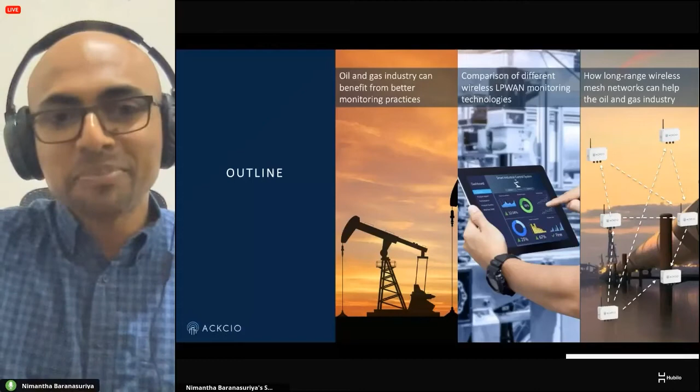So let's get started. I'm dividing the content into three main sections. First, let's take stock on what's happening in the oil and gas industry and how things are being monitored. Next, I'll give a quick overview on different long-range wireless technologies, or LPWAN technologies, that the industry can use to implement monitoring solutions. Thirdly, let's talk about why long-range wireless networks are better suited for monitoring in industrial settings like oil and gas projects, and finally how these long-range solutions can help the oil and gas industry do better monitoring. So let's start with the first part.

Most industries, including oil and gas, do a lot of monitoring to achieve a number of business goals. I'm outlining six here. These are quite obvious actually. Monitoring is done to reduce costs, and to ensure that the assets' lifetimes are extended as much as possible. There are a lot of regulations that govern industrial projects, including oil and gas, so these monitoring practices are required to ensure those regulations are met. And of course, we don't want to expose any of our workers to unnecessary risks, so that's another key requirement.

With monitoring, we get data that is required to manage risks. If something disastrous is going to happen, we get warned, and based on that information we can take quick remedial actions to make sure these things don't end up in a disaster. That's a key risk management element. And finally, with monitoring solutions, we can get data to increase the productivity of our projects as well. So these are quite straightforward.

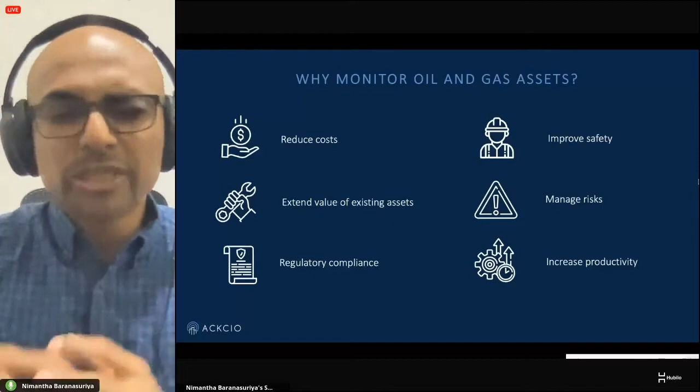So to achieve these business goals, we need to deploy monitoring solutions. There are 3 key monitoring techniques currently being used. This isn't very specific to oil and gas; it happens in other industries like construction and mining, where we're involved as well.

The first key solution is, of course, PLC and SCADA-based systems, where everything is wired. If it's a very small refinery kind of setting, everything can be wired up. All the sensors that need to be monitored can be wired to a PLC, and using a SCADA system, they can be controlled.

However, this becomes quite expensive to deploy, because if the refinery spans across a huge geographical area, you'll be running lots of different cables, and it's not easily extensible. If the refinery grows, you'd have to install more systems, more wires, and the maintenance becomes quite a big headache.

Satellite monitoring is also used a lot, but it's quite expensive. It's not straightforward, and there might be obstructed areas in the oil and gas environment that satellite monitoring could not cover. Finally, with manual monitoring, this is also expensive because you need to send an army of workers or technicians to do manual inspections.

And ironically that exposes them to risks and decreases safety. You're conducting monitoring to improve safety, but by exposing more workers to the site, you're decreasing safety as well. Also, manual monitoring can't be done frequently. So let's say you're inspecting things every week—between 2 visits, a lot of things can change, especially if the project is quite dynamic.

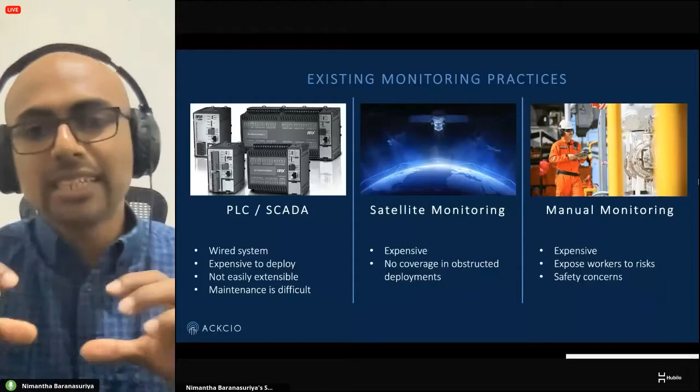So these are not the best ways that monitoring can be done. There are better ways, especially using wireless technologies, that can actually help assist the industry to do better monitoring.

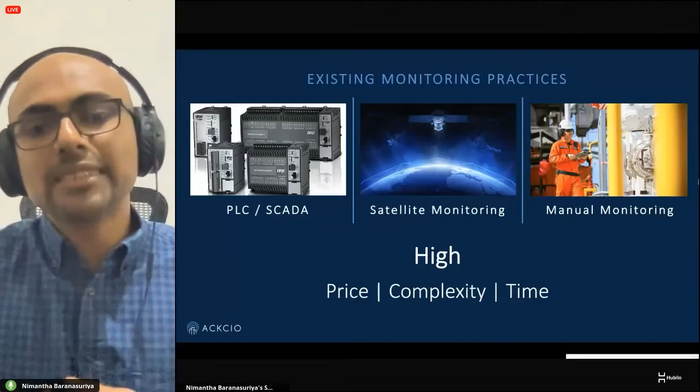So the high-level problem with these monitoring solutions is that the price, complexity, and time are quite high. All these are very expensive solutions. The complexity of deploying them can be quite high—like in PLC systems, you'd be laying a lot of wires, and maintaining that can be quite complex.

And with workers, for example, the time consumption for monitoring is very high. As I said, between 2 visits, a lot of things can change, and you might not know what's happening between 2 different inspection visits.

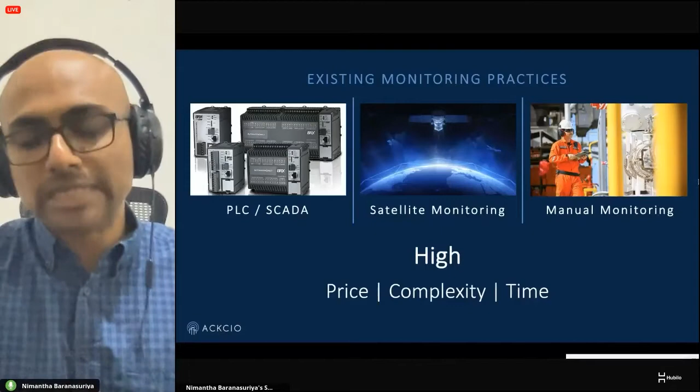So this is where the new wireless technologies can come into play. All these IoT technologies have been improving a lot. There's a lot of movement in the industrial space, across different industries, in terms of adopting wireless solutions for conducting better monitoring. Let me give you a quick idea of how this works.

As before, in any project, you first need to capture physical parameters and convert them into digital values—that's where sensors come in. In the oil and gas environment, you can think of things like temperature sensors, gas sensors, water level sensors, or flow rate sensors. There are so many sensors that already exist, and these now need to be scattered around to monitor different parameters in the refinery.

So let's look at a refinery, for example. These sensors now need to be monitored. Back in the day, you would either connect them to a PLC, send workers to inspect them, take manual readings, or deploy a satellite system. But instead, in a wireless setting, these sensors would be connected to a transmitter, a radio transmitter called a node.

Typically, most systems refer to this device as a node. The sensor would be physically connected to the node, and these nodes typically run on batteries, so they can be placed anywhere in the project. All the different sensors would be connected similarly to nodes.

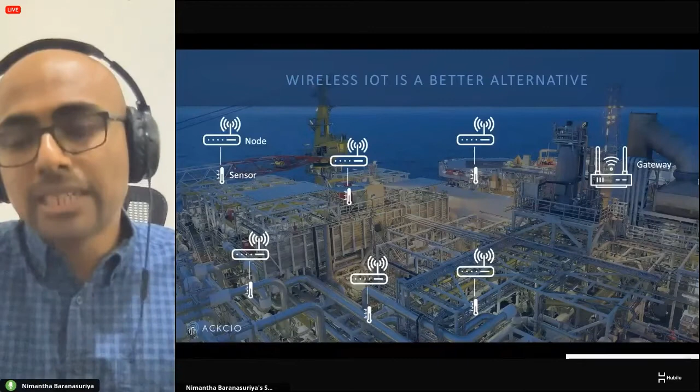And finally, there would be a central device called a gateway or a hub—this is where all the data should end up. This is the master receiver. These nodes periodically take sensor readings from the sensor they're connected with and use wireless radios to transmit their data to the gateway.

So what changes compared to PLC systems and manual monitoring is that this process is entirely automated, and it's quite easy to expand as well. If the refinery grows, you can install more sensors and more nodes as and when you need it—it's pretty ad hoc, so it's quite easy and scalable.

Finally, when the gateway receives all this sensor data, it can upload it to either an on-premise software system or a server, or if it has cloud connectivity, upload it to a central software system that the refinery maintains, so all stakeholders have access to this data for real-time decision making.

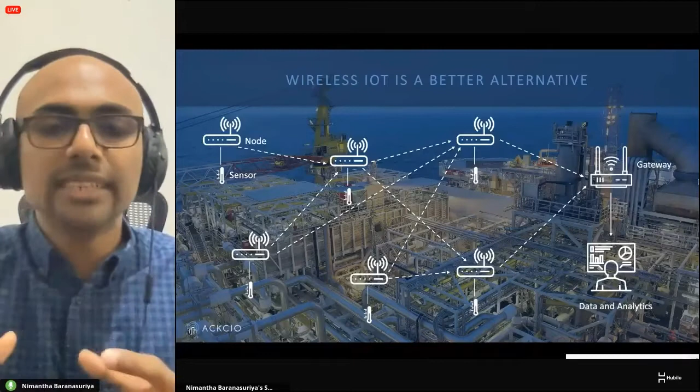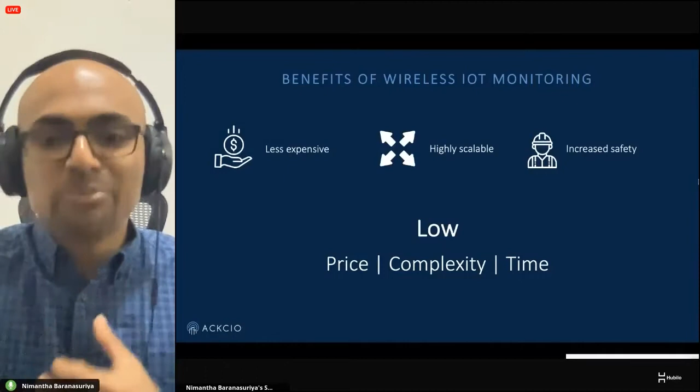This is why wireless is better. It's less expensive and highly scalable because you can deploy systems easily without worrying about wiring. It increases safety because you're not exposing workers to unnecessary risks. The price, complexity, and time triangle we talked about earlier become really low when switching to wireless IoT monitoring systems. This is why industrial projects are better served by wireless systems, since it's easy to deploy, easy to extend, and reduces maintenance headaches.

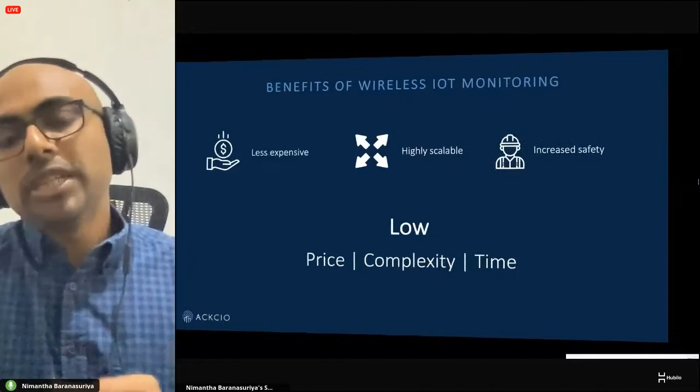Now when it comes to deciding which wireless technology to use, things get complicated because there are so many different technologies out there. In the second part of the talk, I want to compare some of these technologies to show their pros and cons, and argue why long-range wireless mesh systems are better suited for oil and gas. Let's go through that comparison now.

If you look at all the wireless technologies out there, they can be divided into two categories: star and mesh. As we discussed earlier, there would be sensors that need to be monitored. These sensors would be connected to nodes, and there would be a central gateway that receives all this sensor data wirelessly.

In a star setting, the gateway would upload all the sensor data it receives to a central server or software system. In the mesh setting, it's exactly the same - there are sensors and nodes, the gateway receives the data and uploads it to a server. So far everything is the same.

Now this is where things change. In star systems, every node has to transmit its data directly to the gateway. Whereas in mesh systems, that's not the case - they talk to the gateway as well as to their peers.

So here's the importance of this. Let's say there's an obstruction in a project, like a massive tank, blocking a radio link. In star systems, when the obstruction is there, this link gets disrupted, and all the sensor data from that particular node would not be received by the gateway. All that data is lost.

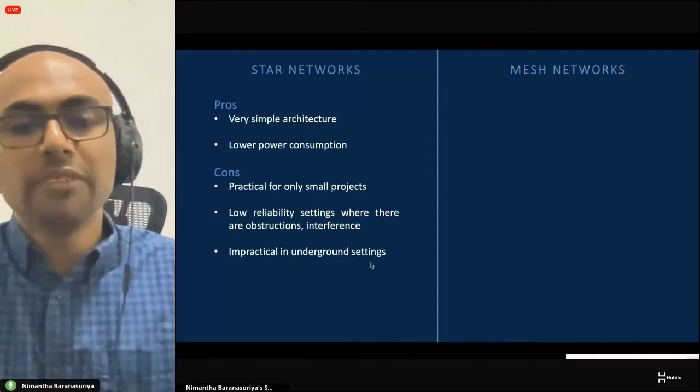Mesh networks offer so much more benefit. They're massively scalable because you can deploy them anywhere, and the devices, because they talk to each other, form very reliable connectivity and data collection in almost any setting. It's suitable for large and small projects, as well as underground projects.

And the other very cool thing about mesh systems is that they give you bidirectional communication. So not just can you have the nodes talking to the gateway, the gateway can talk back to the nodes as well at any point in time.

The cons of this: it's a bit more complex in terms of the architecture when compared to star networks, but when designed properly, the industry or the users don't even have to worry about that, because the mesh is constructed automatically. Also, the power consumption is relatively higher when compared to star networks, but still, although the power consumption is higher, the batteries still last like several years even while running a mesh.

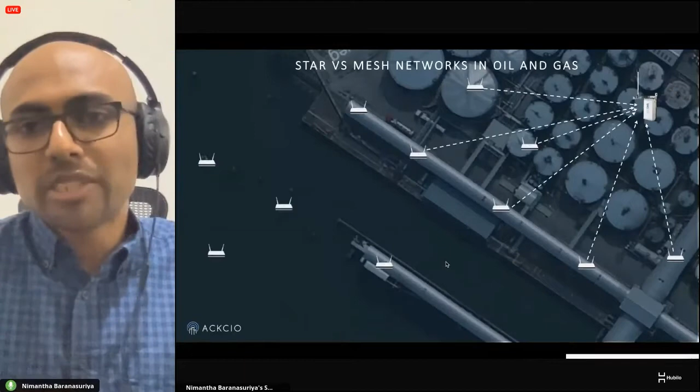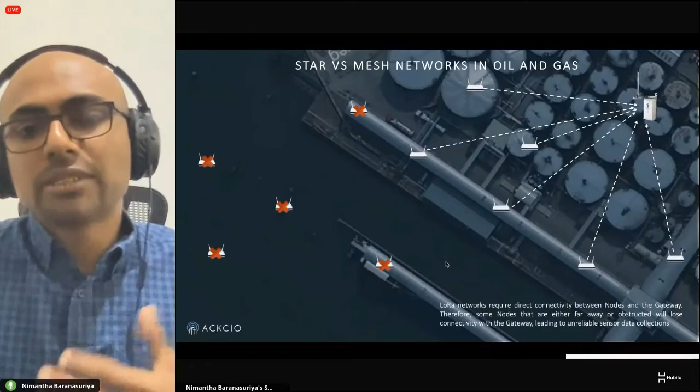So let's again look at some examples of what happens in star systems. As I talked about earlier, every device has to talk to the gateway directly, but there might be some nodes deployed so far away from the gateway that they might not be able to reach it, or there might be obstructions, and therefore in LoRa kind of star systems, the reliability can be lower.

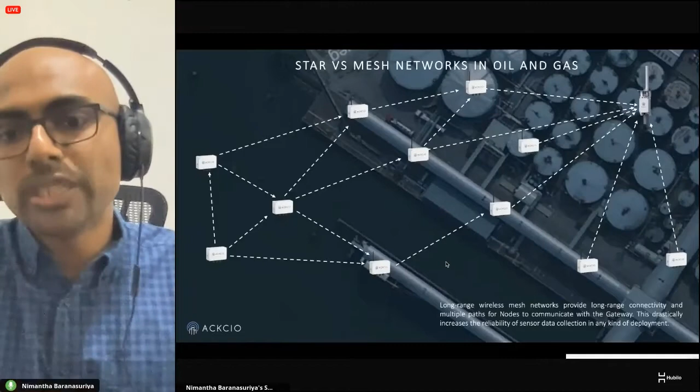But in mesh systems, what happens is they still have long-range links, so they continue to talk with the gateway directly, and the others who can't reach the gateway are not left behind. They talk to their neighbors, and the neighbors forward the data to the gateway. So when you have a long-range mesh system, the reliability can be so much higher.

I also want to take a bit of time to debunk a few myths surrounding mesh systems, because people have been burnt by deploying short-range or Zigbee-based mesh systems in industrial environments. So there's a lot of negativity on mesh networks. I just want to share some thoughts on that.

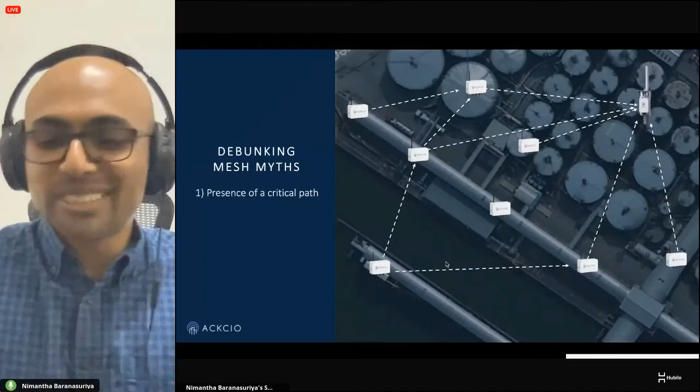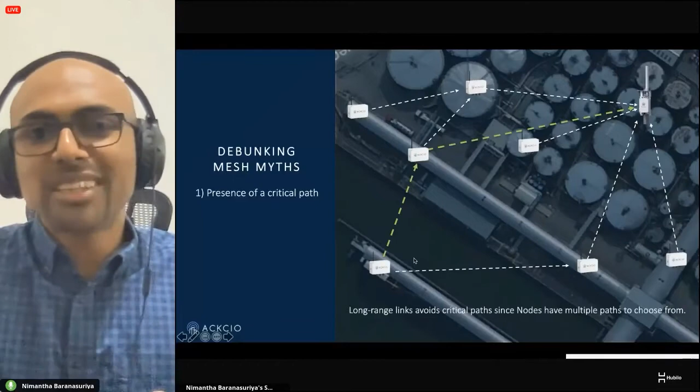The first key disadvantage that people talk about with mesh networks is a critical path. Let's say there's a path being used by a node to send data to the gateway, and a critical path is like if one node gets lost, people argue that this node does not have a path to reach the gateway. That is not correct, because in long-range mesh systems, typically because the communication distance is so long, each node has multiple links or multiple options to choose from. So there's no notion of a critical path in almost every single project we've dealt with, because again, they have multiple paths to choose from. When one gets disrupted, they automatically switch over to a different path.

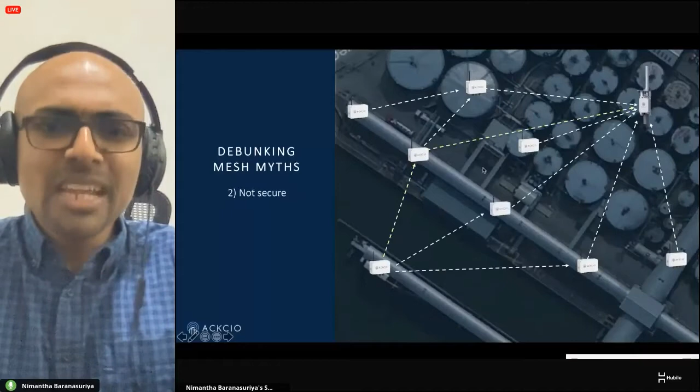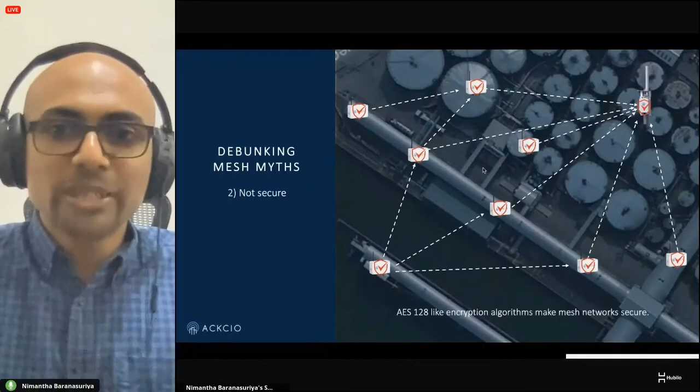There's also the argument that they're not secure, which is not correct, because most new-age long-range wireless mesh systems use AES 128, very secure encryption algorithms, to make the projects quite secure, or the transmissions very secure. So there's no question about security here.

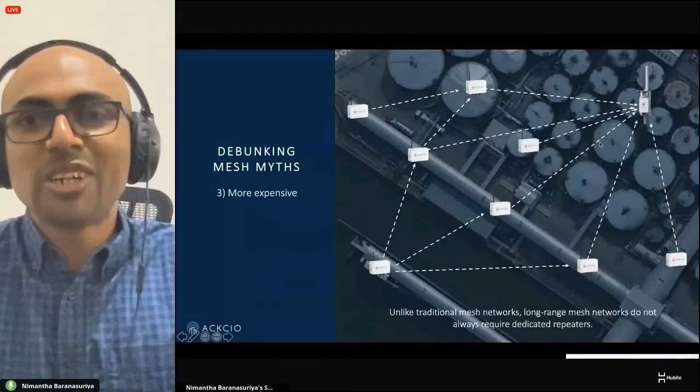The third point is that they're more expensive, because in short-range mesh systems, people have to deploy lots of repeaters. But again, because we're talking about long-range mesh systems, you don't need repeaters, because the nodes themselves act as repeaters. So in most cases, you don't need to install additional repeaters since they already have a few kilometers of transmission distance in each hop. A few kilometers into several hops would give you massive coverage in almost any project, so there's no additional cost involved.

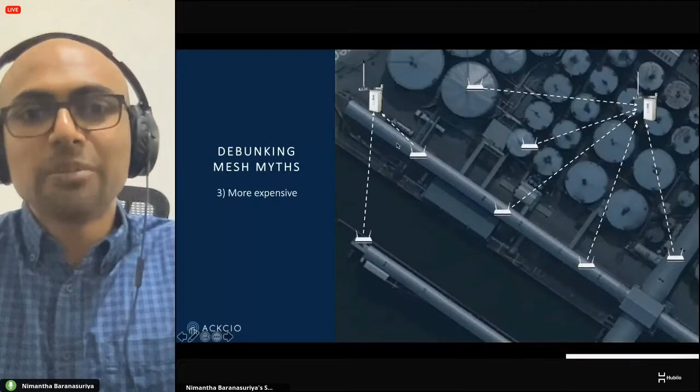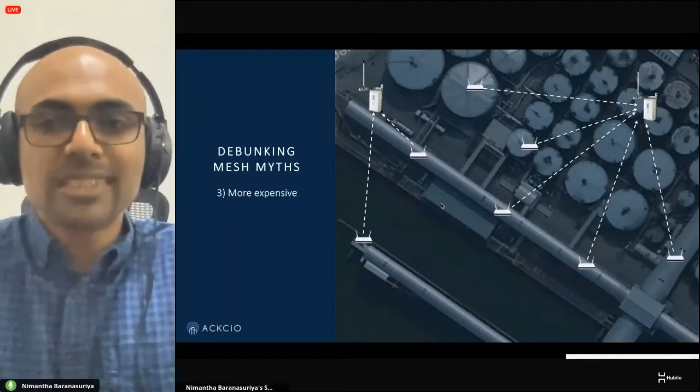In contrast, in star systems, the cost can be higher, because if you recall what we talked about earlier, in star systems every device has to talk to a central gateway. So you might end up deploying multiple gateways to provide coverage for different parts of the project. And because gateways are the most expensive component in wireless monitoring systems, in star systems the cost can dramatically shoot up when the deployment setting is quite complicated, because you need multiple star systems to cover the entire project.

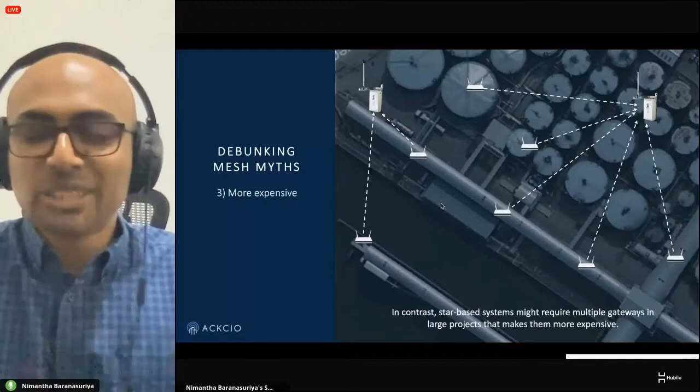So these are some of the myths I wanted to debunk, as I said earlier. In the next few slides, I wanted to talk about some of the really cool features and pros of long-range mesh systems. One is reliability. Again, if you recall, I talked about how they automatically move away from obstructions, because every device has multiple paths to choose from. So if one gets obstructed, it automatically chooses a different path.

The other aspect is interference. Let's say you have a project using this green frequency, like channel 1 on 868 megahertz, to form the network. And one fine day, maybe there's a cell tower or something that starts blasting on the same frequency, or you have another wireless deployment that runs on the same frequency. That would cause an enormous amount of interference in the network, and that would cause the reliability to go down.

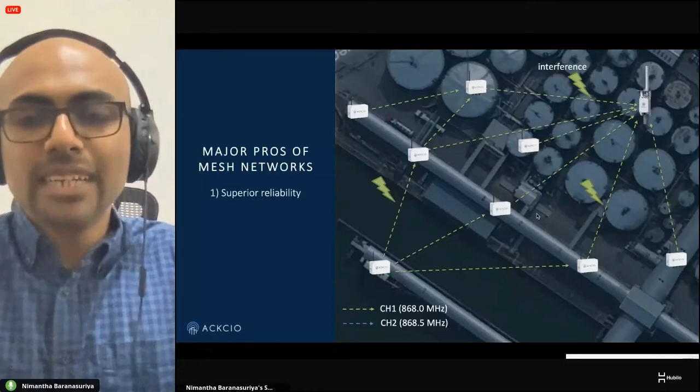In these long-range mesh systems, devices automatically detect interference and switch over to a different frequency. For example, they were on a green frequency and now switch over to a blue frequency automatically. There's no user intervention necessary - the devices automatically take care of this frequency hopping.

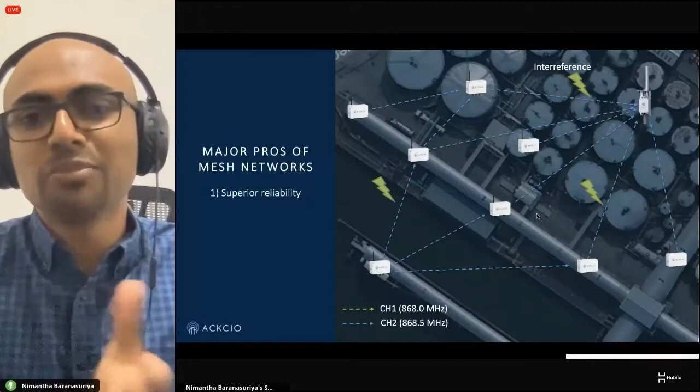It's called synchronized channel hopping. When interference happens in the green channel, the nodes and gateway are already on the blue channel, so reliability remains quite high. In most long-range mesh systems that run on channel hopping, reliability can be as high as 99%, even in very challenging industrial settings.

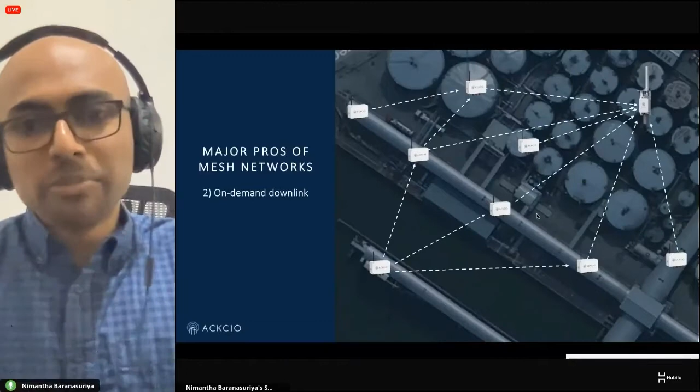The other feature is on-demand downlink. The devices not only talk between themselves and send data to the gateway, but the gateway can send data back to the nodes as well. This becomes important, for example, when the gateway wants to push updates or configuration updates to the nodes - it can be done at any point in time. This is very advantageous for industrial monitoring projects.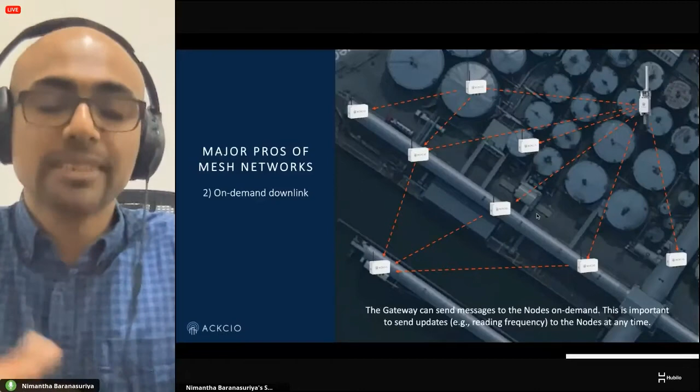The last really cool thing about these mesh networks is time synchronization. These networks automatically are tightly time synchronized, meaning all devices, although they run independently, have almost the exact same time running on their clocks - synchronized in the order of milliseconds. So when all of them take sensor readings, those readings are taken almost at the exact same time.

This becomes very important, especially if you're trying to correlate sensor data. You want all that sensor data to be taken throughout the entire project at the exact same time, which can definitely be achieved through these mesh systems. So these are three key unique advantages that a lot of people are not aware of, that I wanted to share during this presentation.

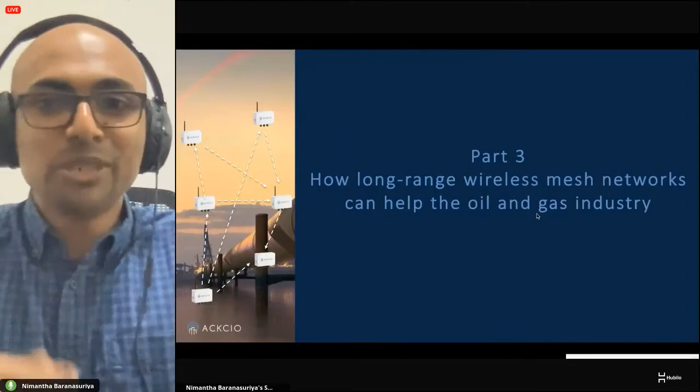That brings us to part 3: how long-range wireless mesh systems can be used by the oil and gas industry for implementing better monitoring practices. I'm using three very simple examples here - pipeline monitoring, monitoring refineries, and monitoring offshore rigs.

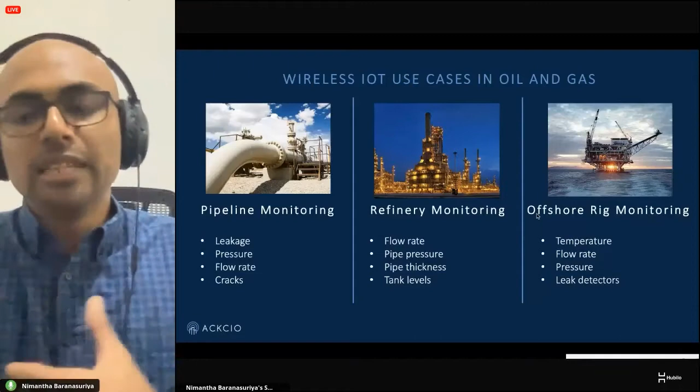In most of these projects, the use case is very simple. There can be lots of different sensors to be monitored, like pressure, flow rate, tank levels, leak detectors, and things like that. All of those sensors can be connected to these long-range wireless mesh communication nodes and then monitored in real time. To illustrate that, I'm using the same example as before.

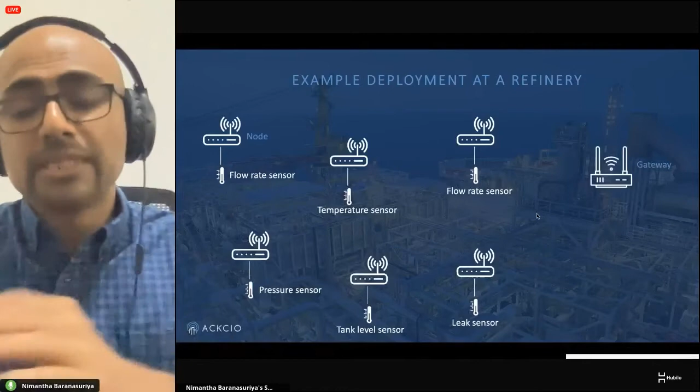Let's say in the refinery you have sensors deployed everywhere - flow rate, temperature, leak, and tank level sensors. All those sensors would be connected to the nodes as we discussed before, and the deployment would have a gateway. These devices would use long-range radios and form a long-range wireless mesh network to collect all that data and send it to the gateway.

In doing so, you reap all the benefits. You have very reliable links that mitigate any interference issues, mitigate obstructions, and are very secure as well. They run for years on batteries, so the system can be easily extended.

If the refinery grows and you want another temperature sensor or pressure sensor in a different part of the refinery, it can just be added in, and that node would automatically join the network and form a very reliable communication system.

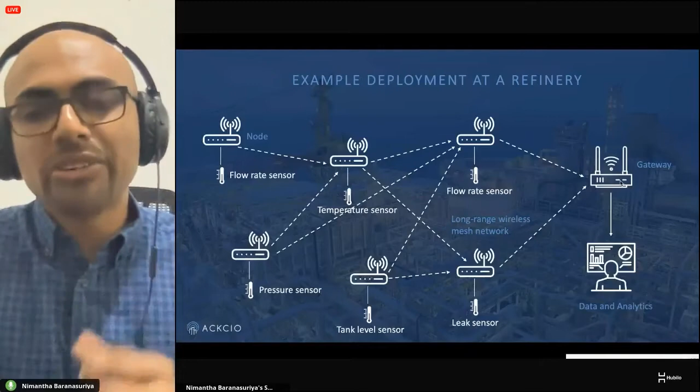Finally, once the gateway collects all that data, it would be uploaded to either an on-premise server or software system for monitoring, or even to a cloud server. This is exactly how a long-range wireless mesh communication system can be deployed in oil and gas settings to implement very, very reliable monitoring solutions.

That brings me to the bulk of the story that I wanted to share - how all these long-range solutions can be deployed in oil and gas.

I just wanted to give you a very quick introduction to Ackcio and show how these technologies have been used by us in other industries like construction and mining to solve the same problems that the oil and gas industry is facing as well.

At Ackcio, we built a very reliable data acquisition system called Ackcio Beam that can be used in industrial settings to monitor various industrial sensors. The solution has three components: the devices, which are our nodes and gateways that connect with existing sensors; our patented long-range mesh communication protocol that binds all these devices together; and finally the software that you would use to set up and monitor the deployment in your projects.

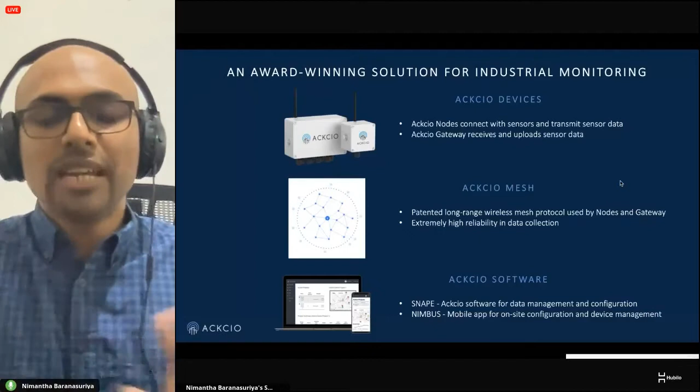It works exactly like what we talked about earlier. The sensors are connected with nodes, they run on batteries, and they can be deployed anywhere in your projects. Then they use a long-range mesh system to talk between themselves.

So the radios have a transmission distance of up to 10 kilometers in ideal environments, but in realistic settings, it can be a few kilometers. Finally, once the gateway receives all that data, it aggregates everything and uploads it using either an internet connection or even a private network to a destination of your choice.

So this is the cool part of the solution we provide. We don't link the system with cloud service. A lot of industries are very particular about the security or privacy of the data. So once you deploy the system, it's entirely closed, a closed loop system. All the data would be channeled to your servers and software, and we would not know how many devices or where the system is deployed. The system is entirely secure and private in that sense.

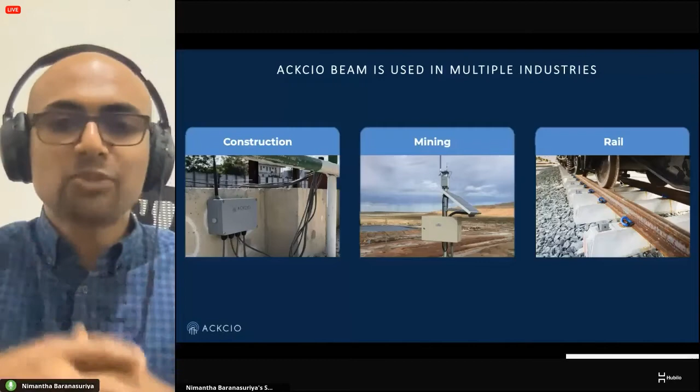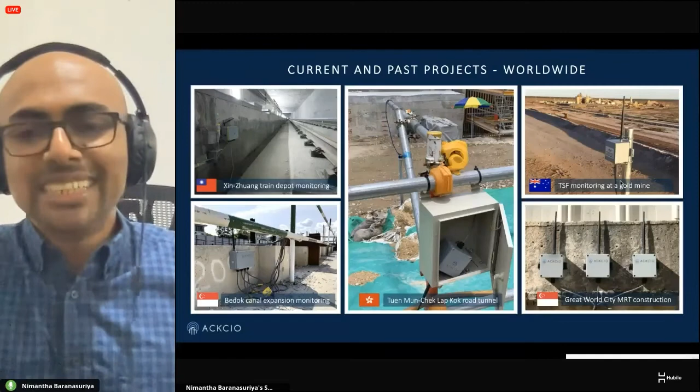It is currently used in multiple industries like construction, mining, rail, for monitoring various geotechnical and structural sensors. Again, as I said, we don't provide sensors. Instead, the devices are compatible with existing industrial sensors, so you can get sensors from any manufacturer and just plug them in, and the devices take care of the monitoring aspect. It has been deployed in various construction and mining projects all over the world, in tunnels, mines, and underground construction projects as well.

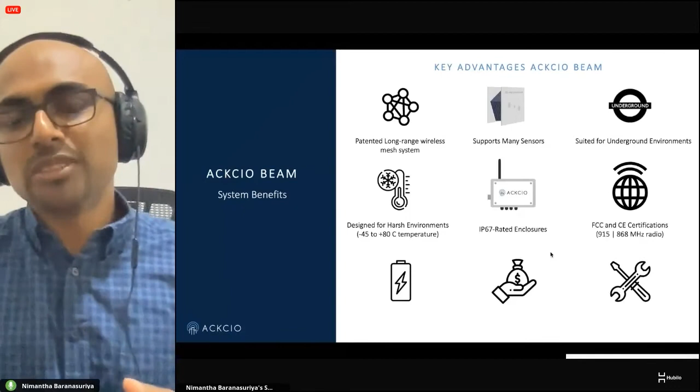So coming to the last part, the system runs on a long-range mesh system, and we support many sensors directly with pure plug-and-play operations. It's suited for underground environments. It has been designed for very harsh environments, IP67 rated, therefore they can be easily deployed in outdoor environments. We have certifications for the radio, which allows you to deploy them in almost any country in the world. They're battery powered, and batteries last for several years in almost any deployment condition. Quite cost effective to deploy, and easy to set up and maintain as well.

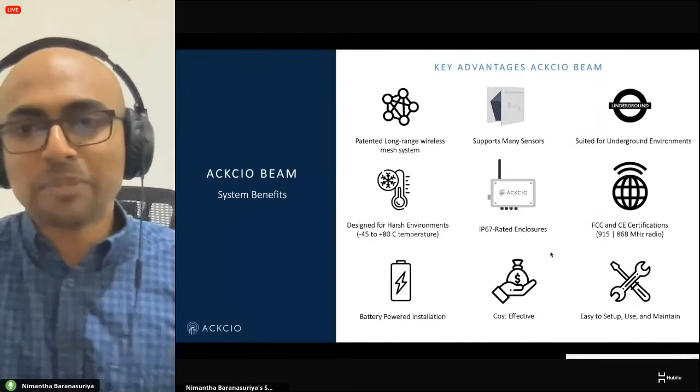In terms of business benefits that you can gain as oil and gas project owners, first of all is that you would be able to reduce your monitoring costs by up to 70%. This is the highest saving we have seen in some of our monitoring projects in the construction and mining industries when clients have implemented it.

It also helps you implement state-of-the-art risk management processes, because all this data is communicated with almost 99% reliability to you. So with all the data, you can implement very strict risk management practices to keep your projects and workers safe. Finally, it increases productivity and reduces non-productive time, because you always know what's happening in the projects, and that helps you streamline your processes really well.

With that data, when dealing with your assets, you can do predictive maintenance and also enhance their lifetime, because you know when things are about to fail, so you can take remedial actions very fast. This increases the safety of everyone, all the stakeholders in the projects, and also helps you comply with regulations that govern all industrial projects as well.

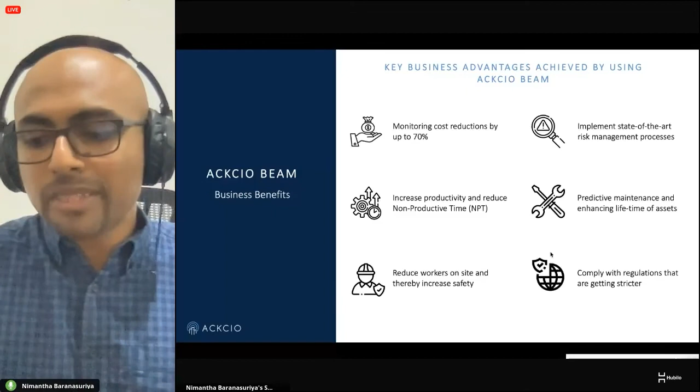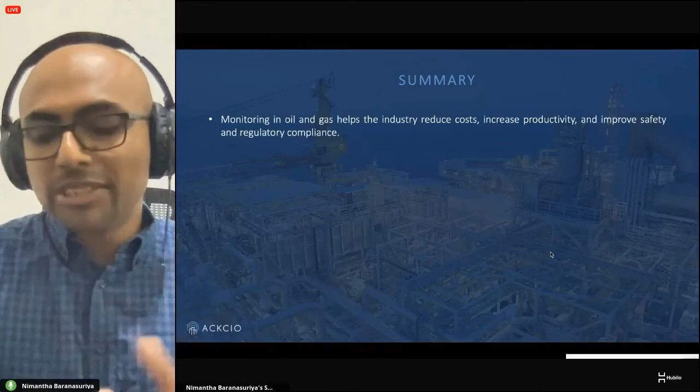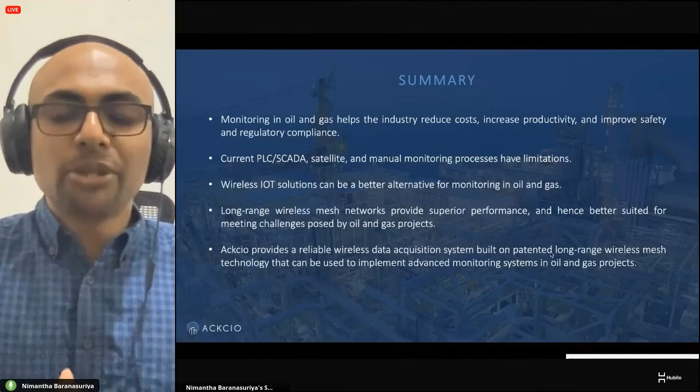So that's pretty much it in terms of the talk. Just to summarize everything and put things into perspective: we first looked at the oil and gas industry and argued why monitoring happens, what the benefits of doing monitoring are, and how current monitoring solutions can be improved by using wireless IoT-based systems. Then we looked at different wireless technologies like star versus mesh, and argued why long-range wireless mesh-based systems have superior performance and better results in oil and gas environments, and in any harsh environment for that matter. Finally, we showed a little bit about what we do at Ackcio and the kind of systems we build to help automate these industrial monitoring practices in industrial settings.